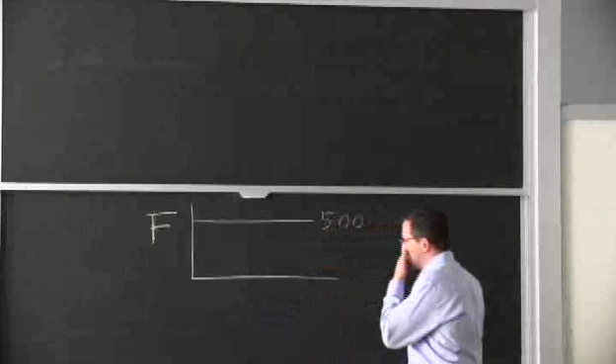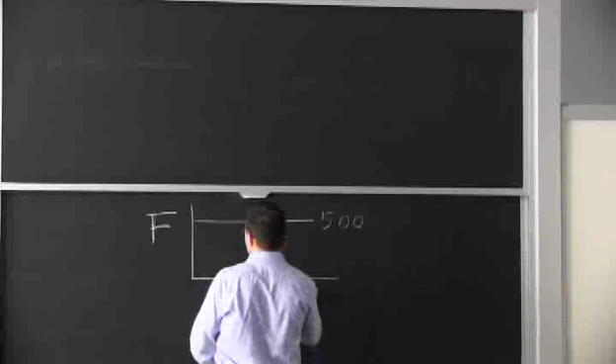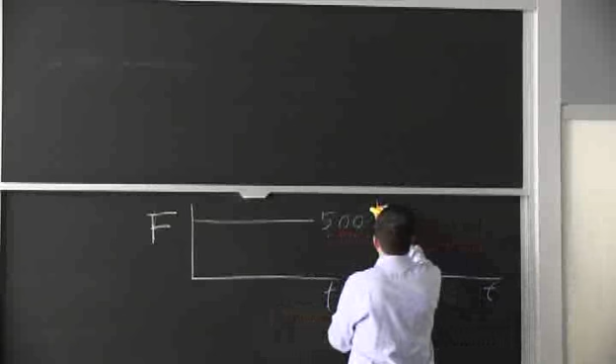So it's a constant load. We put 500 pounds on a specimen in my test fixture here for the binding. What happens is over time... and I should plot this separately. So this is time in both cases, and now I'm putting the deformation, which is essentially the elongation divided by the original length of the sample.

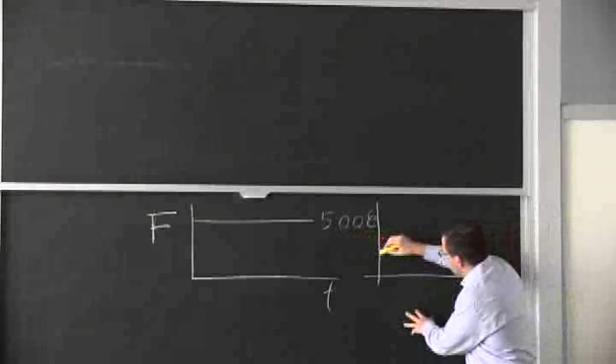Initially, when I apply the load, I have a certain amount of deformation that's given by the elastic constant, or Young's modulus, and you're all familiar with that. But after that, over time, you'll have a continued deformation that will typically slow down. So in there you have a viscoelastic response, and then you have a viscoplastic response.

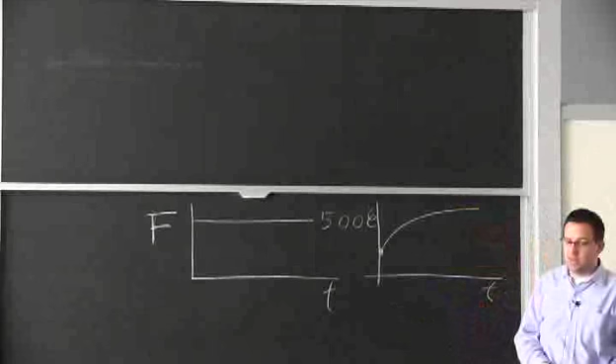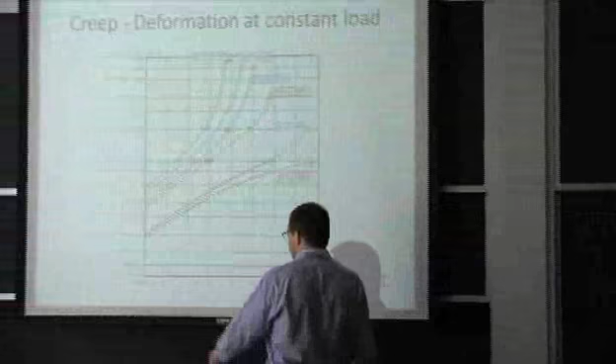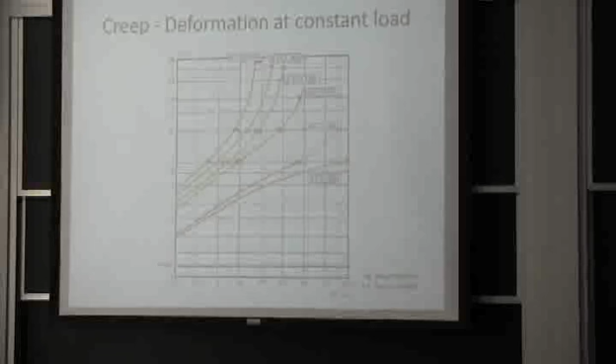So it keeps deforming, and even though on my plot here it looks like it's going to a plateau, what you're seeing on the screen is a log scale. It goes from minutes up until 50 years on the same plot on a logarithmic scale. And you can see there that as far as the plastic goes, in this example, at ambient temperature, it keeps deforming. As long as you have load on it, it deforms.

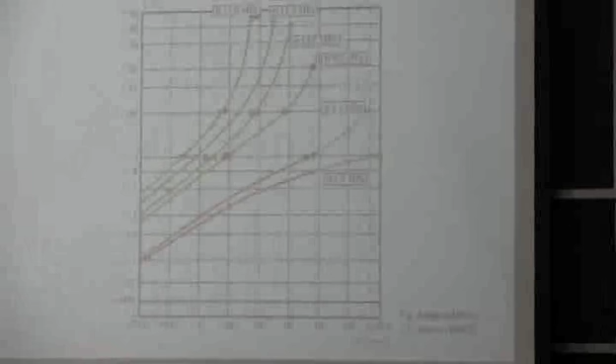Depending on how much load you have, and these are the different green curves, you can have a failure in creep, or you may have a useful life. There's a big distinction between them.

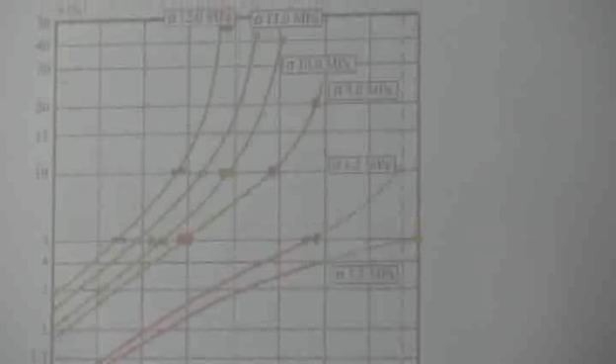Some of the red curves here, looking at the lower one, it's only 5.2 megapascal as opposed to 12 megapascal for the highest one, on a plastic that could have approximately 30 to 40 megapascal of yield strength. So it doesn't matter too much what the yield strength is if you're going for a design like this with long life.

What matters is how you're going to evolve in terms of deformation and ultimately fracture in a long-term application of approximately constant load. And we have an example of that, and I'll circulate it.

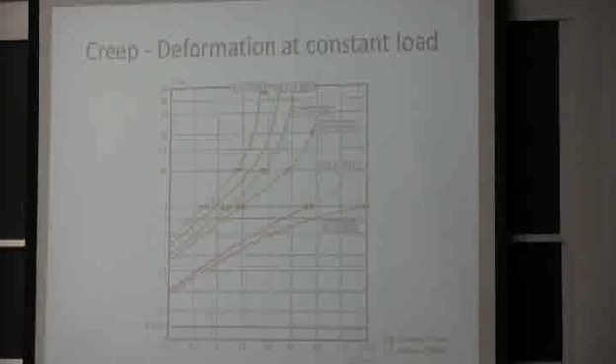This is a CPVC plastic pipe. It's used for fire suppression systems, so it's at relatively high pressure, maybe 150 to 200 psi, about twice what you have in potable water.

Now there's one side that's flat—that's a cut we made to see half of it. But on the upper side, what you see are a lot of small cracks, and probably you'll see the growth from the inside out, which resulted first in leakage and eventually an overall burst of the pipe.

So it does happen. A lot of times it happens because you have a bad overall combination of conditions. It's not necessarily just, oh, in this building it was a little bit warmer, or the pressure was a little bit too high. You have more than one of those variables coming into play.

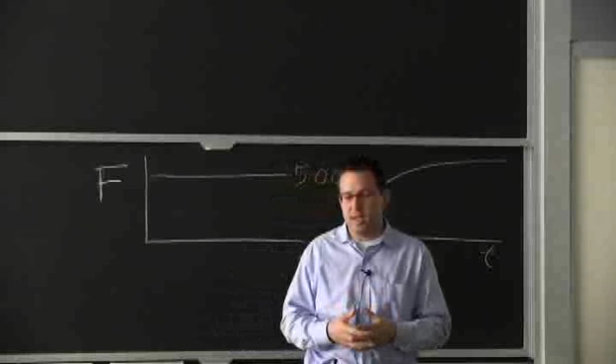And for those plastics, unfortunately, contaminants also make a big difference in helping create the little cracks. But the overall process remains that you don't know anything about whether you have damage being created unless you go and look for very fine cracks.

There are other cracks very close to the one that you see there, and they're visible because there's a black discoloration. But most of the time, it's on the inside of the pipe, and there's no easy way to find out that it's there.

It happens under constant load—the creep—and it's slow. The first step is you deform, so you grow the diameter in the case of the pipe. Eventually you start a crack, and the crack grows slowly. In this case, it did grow all the way through the thickness before you had the final burst.

Can I ask a question about that? Yes. Do you know, does the orientation of the pipe matter? Do these cracks begin on the top or the bottom? Sometimes they do—it's a very interesting question.

My comment would be that it's very unfortunate for those pipes that the hoop stress, all around trying to grow it, is about twice as much as the longitudinal stress, and the extrusion direction makes it stronger in the longitudinal way. So I'll detail that to make sure we cover this.

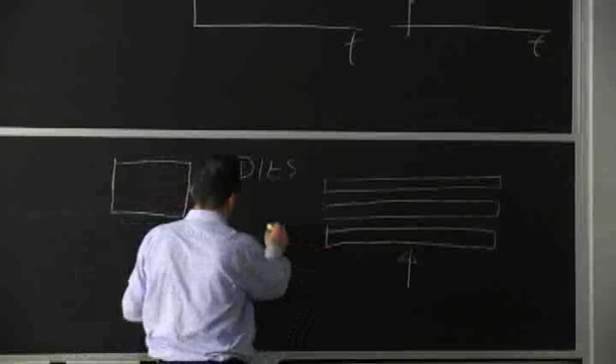So to your question, with respect to what we call the clock position around the circumference of the pipe—is it going to be on top, at 12, or at the bottom, 6? Sometimes it matters and sometimes it doesn't, and I'll tell you why. If you have a certain amount of contaminants in the system, having more of it doesn't make a difference—it's a little bit like a catalyst. And therefore it becomes relatively well distributed all around. In that example, I don't remember if it was the bottom.

All right, so any other questions? If I keep saying a word you don't understand, please interrupt me—there's nothing wrong with that. And if you think it needs clarification, I'd be happy to pick it up.

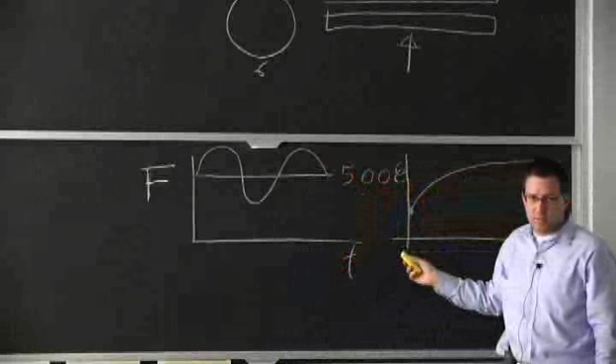Fatigue is very similar to what we had up there, and therefore I'll reuse it. Except now, instead of having a constant load, I have a fluctuating load. There are different ways you fluctuate the load, but that's the way I used here. Then you can count either half cycles or full cycles, depending on how you do it. And you can have it with what we call a mean load—it's still 500 plus or minus a certain amount. Or sometimes it'll be 0 plus or minus a certain amount. This creates the same amplitude, except the mean load is close to 0. And we call that the loading ratio.

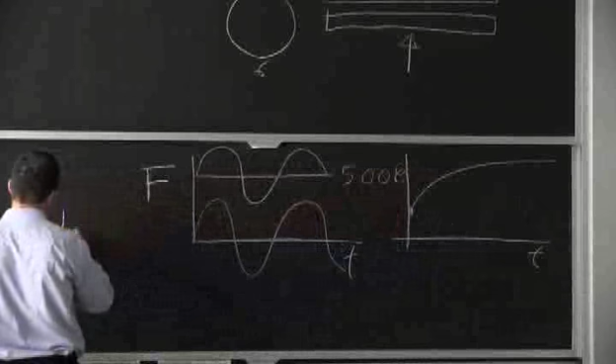It's coming—in most fatigue books it will give you R, which is the minimum over the maximum. That's all there is to it. It's only helpful if you're trying on a chart to figure out if the fatigue data you've been given is relevant to your application. So that's where this comes in.

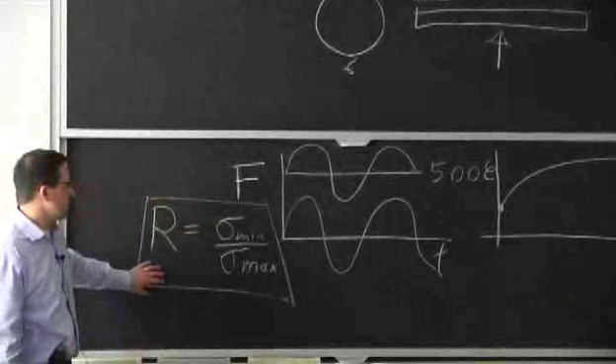If we have the sprinkler pipe we talked about, the pressure fluctuation would be day and night, or turning on and off the pumps. So you'll have a relatively high minimum stress, not too far from the maximum stress, so it'd be close to 1 here—let's say 0.75 for our reference. And when it's varying like this, it's -1. That's a standard, if you will, for some of the measurements. There are other standards, but it typically goes from -1 up to a certain amount, close to 0.75. So we cover the range here.

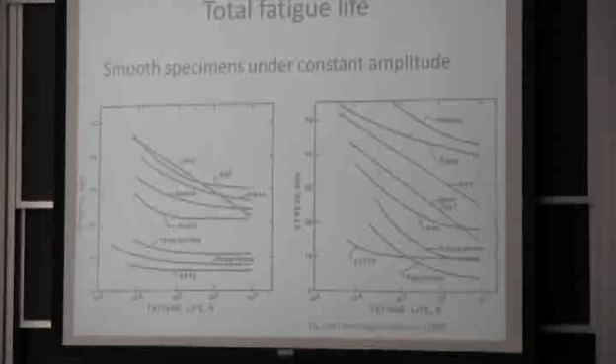Good. Those curves I've put on the slide are just examples to show you—these are plastics that will have different strength in a long-term application. Some of the common ones, polyethylene and polypropylene, are not really the best, but they have other advantages in terms of forming, cost, and density, so they're still used a lot.

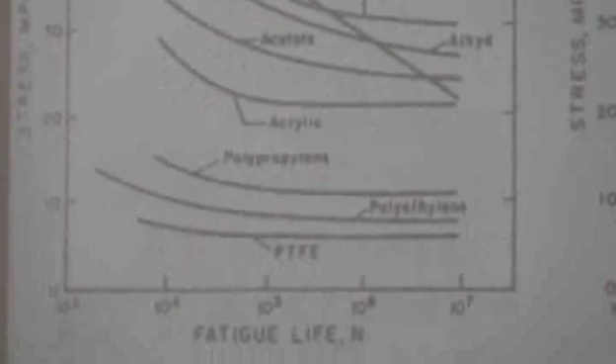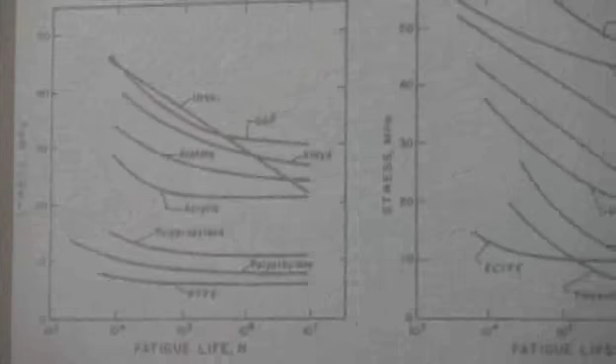But you can see you can't go just by cost. If you have an application that's a little more demanding—some of the components inside cars close to the engine—they'll go to a nylon type material as opposed to polyethylene and polypropylene because of temperature. Otherwise they'll have to make it too big, for example. So it's not necessarily fatigue in that situation, it's more the creep resistance at temperature. But it's to give you a flavor.

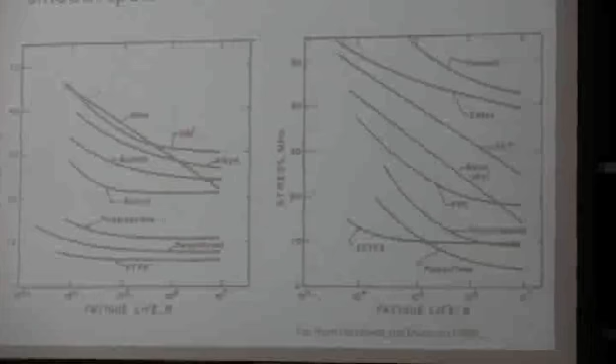This is not—I didn't magnify the scale, I didn't show you from 40 to 50. It's really from 0 to 50 that you have this range of resistance for those different plastics. The example is for fatigue, but it's the same effect for creep—there's a lot of difference. And they also have different resistance to the environment sometimes, to gases.

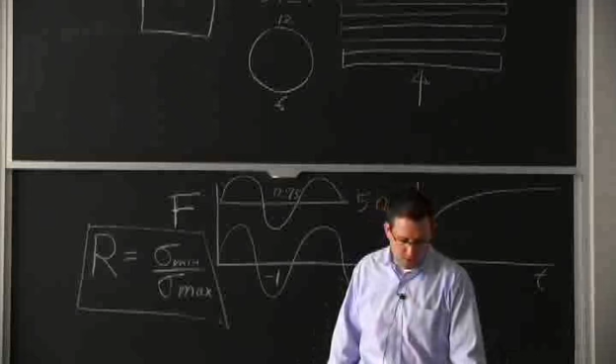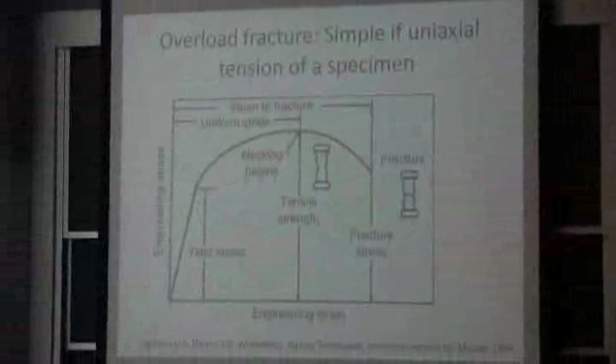You reach a certain apparent maximum, and I want to be very clear about that - it's only apparent. It means at that point you're starting to form a neck, but it doesn't mean the material itself is becoming any weaker. It actually keeps getting harder and harder as you keep deforming it. But now, instead of deforming everywhere, you lose your section. So this curve of engineering stress is still based on the original area, but now your area is reducing fast, and that's why we have that appearance.

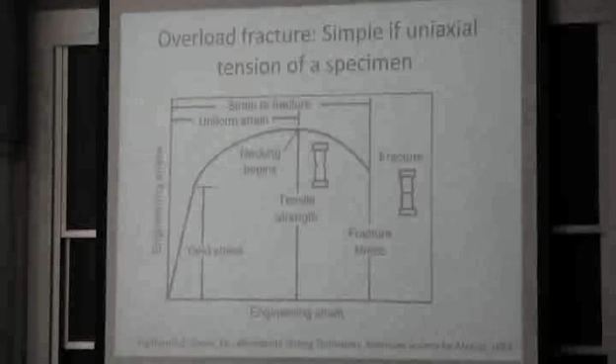I want to make that distinction because I heard yesterday there were quite a few civil engineers, and I work with civil engineers. They see a stress strain curve, they look at the elongation at break - if it's 25%, they think it's important, that the value of 25 is very different from 22 or 28. But at the end of the day, that value of elongation when you reach the fracture stress

is a combination of what your specimen is, and also, obviously, your hardening. The more you harden, the more you'll be able to deform and stretch before you get to that neck. But if I take a thin specimen of the same material, it will start necking more slowly than if it's a good, round, big piece.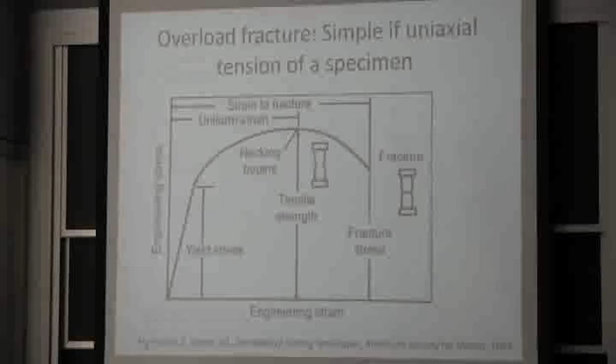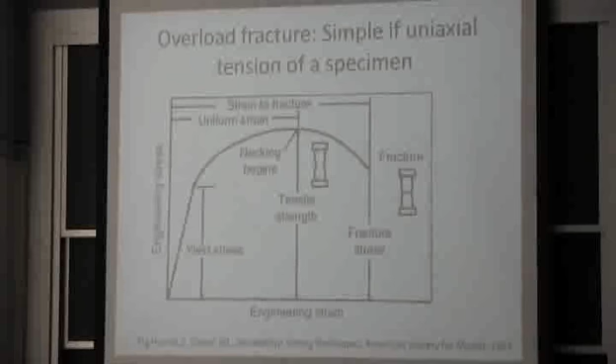So all those values, the fracture stress and the elongation at break that we talk about a lot, are not intrinsic material properties, we call. They are engineering data that we can use, but we should try not to overuse it. We should try to understand what's beyond it. And this relates to deformation, so I'm going to defer on the details - I don't want to leave you with an incomplete description. But for now, I think the idea is, if I take a specimen in the laboratory with that constant section and I pull on it, it's different than in other applications.

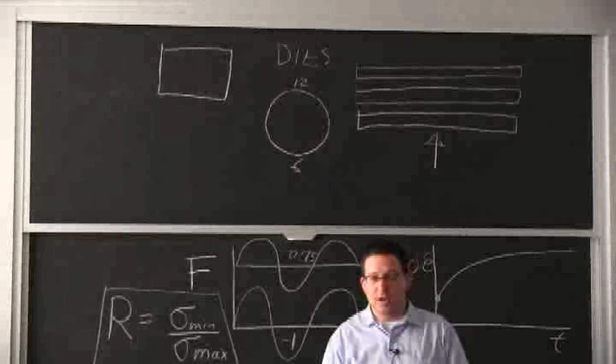For example, here, I'm going to pass on those screws. If we had done the material test on those two screws in the laboratory, we would have gotten a stress strain curve with maybe 20% elongation - I'm making up the number, I don't know exactly what it would be, but a certain elongation. But if you look at it, the way it broke, there's no elongation. And then the question is why?

Well, it could be multiple reasons, but one of them is you have these threads here that act as stress risers. This is another stress riser example from any elementary class: if I have a hole in a plate, the stress around here is going to be 3 times what it is far away when I'm pulling.

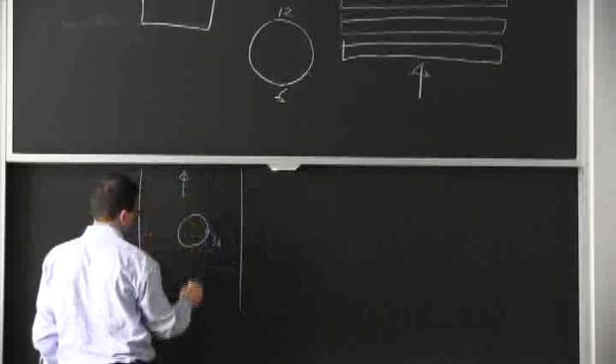If you have a notch on the surface, which is what we have here, it's going to be an even higher factor. So what I have is actually something like this with a small radius, and goes the other way - so I'm making a screw here. I'm going to say 5 to 10, depending on what the situation is.

So that's really where the question of whether you have a ductile material or a brittle material comes in. When you are in a constrained situation - and we saw that with the fastener that was holding my gutters when we had the snowstorm last year - it really didn't do too well. It didn't neck, and therefore all the information from the stress strain curve is useless. We have to go to another level, and that's what we'll cover next week.

Another example where you can't use the stress strain curve the way it's set up. Let's see, I'll use these. If I have a detail where I manage to get the material to work in shear - and the way I do that a lot of times is what we call gusset plates. Oh yeah, civil engineers, so I have to be careful, you guys know all about this. So I put a plate, and then I have a member coming in, say

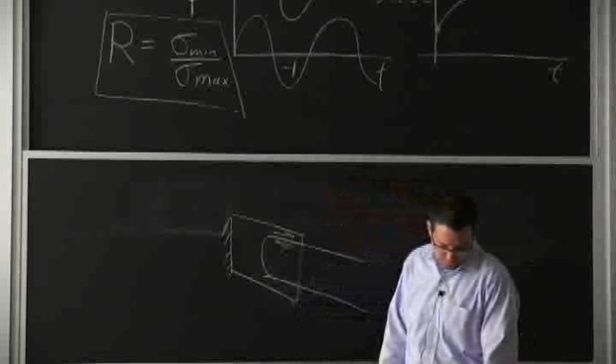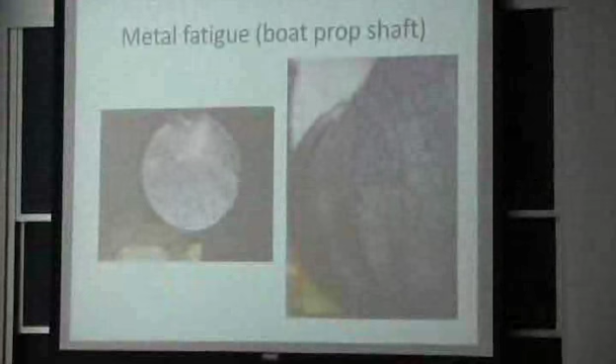Another example here is a shaft for a sport boat to go in the ocean. That was a side project a couple of years ago. Somebody came, said he lost his prop after using the boat for 200 hours, and he was very upset about this. He wanted to know what was going on. It's a very fancy piece of equipment, an Inconel, about 6-inch diameter shaft. And the question was, what happened? So I had to find out a little bit more about what he was doing. I asked him if the prop was balanced. Sounded like the first question to ask.

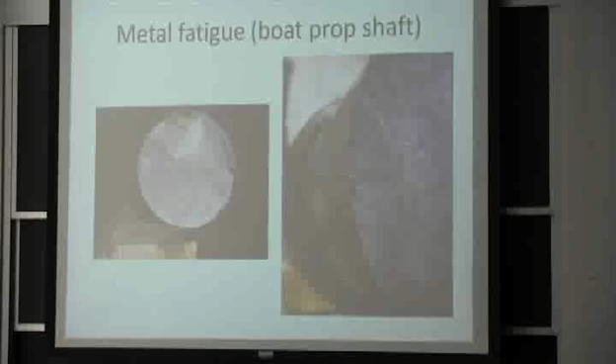And I also asked him if for any reason some part of the prop was outside the water. Yeah, the prop was good, and it was in the water, balanced and everything. But I got to talk to his mechanics enough to understand that it's really a high-speed boat, so only half of the prop is in the water as it rotates. So what you have is as simple as this: the shaft goes off the back, and you have the prop, I'm going to make it circular. And it's rotating, but the water level is right about here.

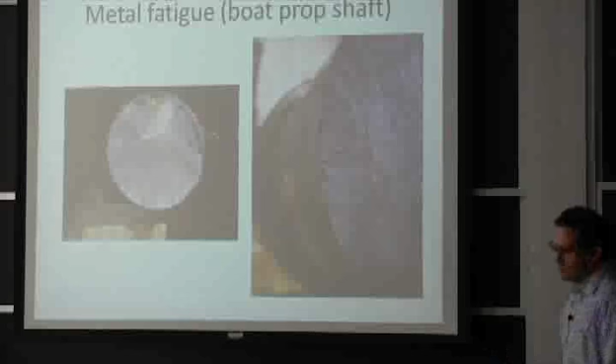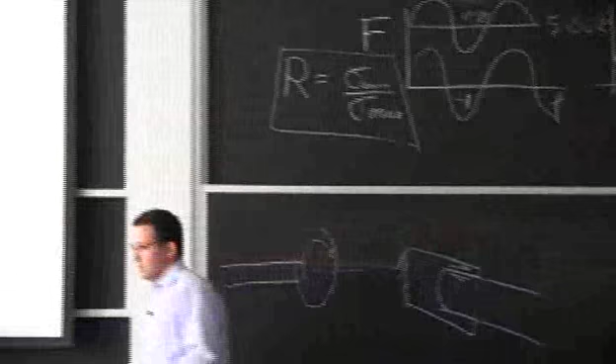And therefore, at each turn, you get a huge bending load in the shaft. That's what I saw on the fracture here, because the crack started in the lower left corner right here, and you see all these lines over here up until this point, call them beach marks sometimes. And then eventually right here, there was the final overload. But by the time you had the overload, you already went through half the section almost of that shaft. So it wasn't a crazy high load because it would just bend the whole thing. At the same time, it was a very significant load because after you've gone through half of it, the load was sufficient to break open the other half.

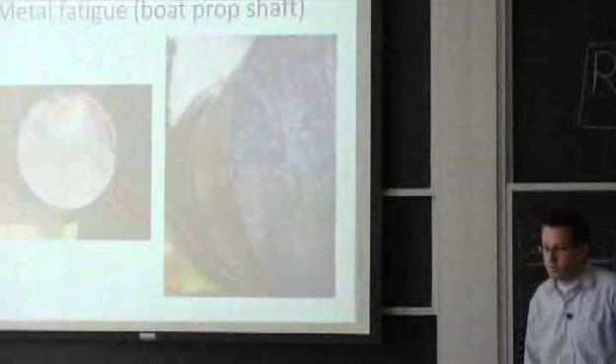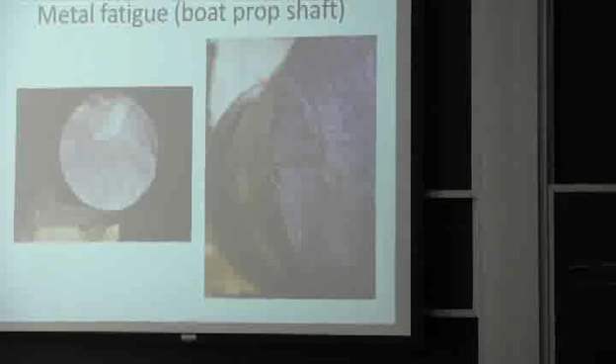And we have some material properties that we use to figure out approximately what that load was based on the crack size. That's also something we'll cover in the class, but I wanted to bring it up right here. There's a blow-up image on the right-hand side - that's your initial flaw size. It is visible; if I could bring that shaft in, you can see it if you're careful, but it's small. On a 6-inch shaft, it may be 0.5 millimeter. But even at 0.5 millimeter, you can tell that it started from one place and went all around. So that gives us some idea of what's really a bad flaw.

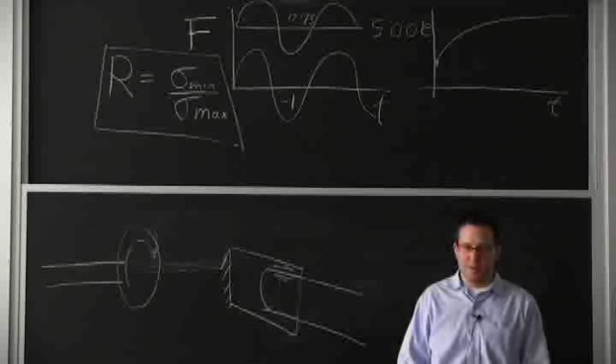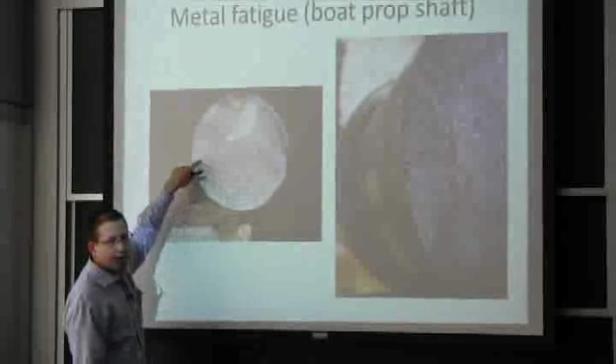This is a bad flaw because we only have one crack that started here. It went all around up to the middle and overloaded. If we had a bunch of small flaws, what would happen is you'll have a little circle around here, another circle around here going towards the inside, a little bit like we had with the plastic pipe. That's the big difference - the flaw size in this case was large. It wasn't so much of a material flaw because there was wear. There was wear between all the gasketing system here of the boat and the outside, and that created that flaw.

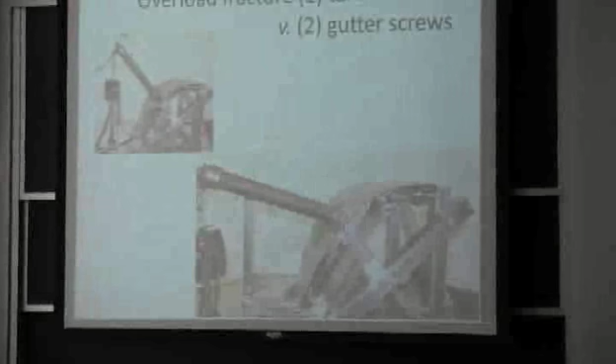But we had to go through the process of figuring it out, and I thought the flaw size here was something different. This is just an overload, a little bit like we talked about for shear, except that it's the bending of a shell, and there are welds and everything, but nothing happens really to the material. It's just changing its shape because it's ductile.

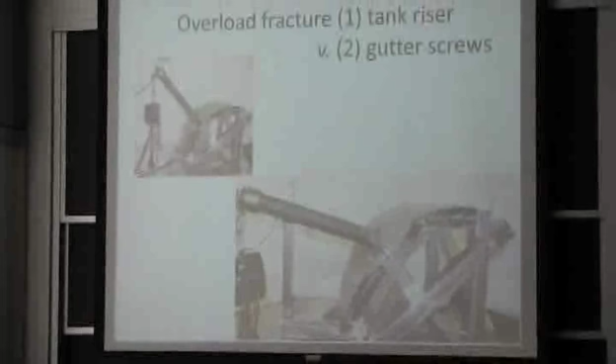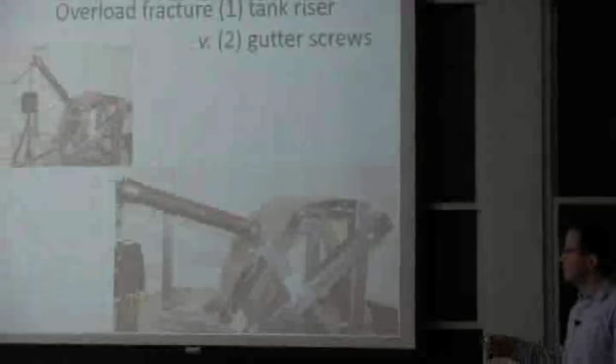So one of the things maybe on top of the list when you design something is figuring out if it's going to be deformable or if it's going to be at risk for fracture without really a change in shape. This was a one-time load. If we had done it 10,000 times, we'll take that pipe out without deforming the plate right here. So it's very important to keep in mind that the reason this is different is not so much the geometry, it's because there was one overload as opposed to multiple loads.

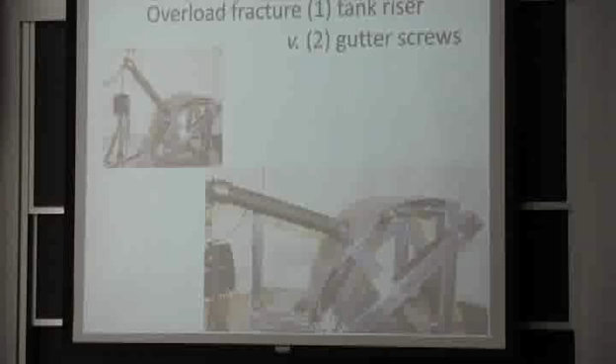That's very important to find out when you're designing a product or a structure: how many times is it going to be loaded and unloaded? Sometimes it's easy to find out, sometimes it's not. We'll go with an easy one.

It's the front wing of an airplane that extends out for takeoff and landing to create more aerodynamic resistance and get a little bit more lift. Have you seen those? We hear them all the time, we hear the little mechanism for them. It makes a lot of noise, gets people worried. I get worried.

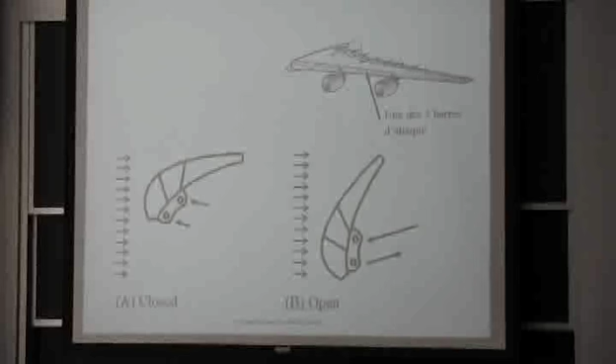There's one of the things that's important about it. It's at the very front, and the aerodynamics there is critical. It needs to be able to extend out for takeoff and landing. It also needs a de-icing system, so you can keep doing your maneuvers even if you have to land in bad weather or take off in bad weather. It's mostly for landing. For takeoff now, they heat things up. They heat the body. So that's how it looks.

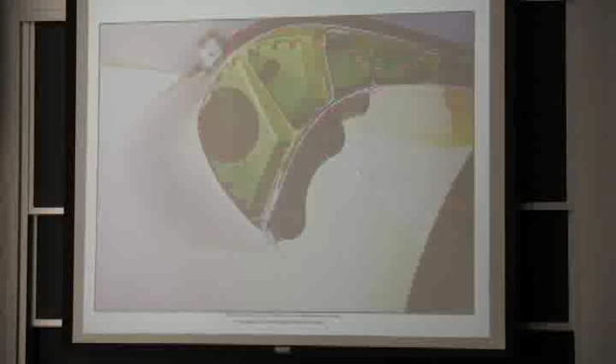You have the skin, aluminum skin, and what's in green in this case, the titanium rib. It's the same rib that has two holes on the right-hand side, and the big hole here is for air circulation. They'll bypass air from the engine exhaust and heat things up when they have to. And that's the main reason for using titanium here as the primary structure as opposed to aluminum - it's a temperature consideration.

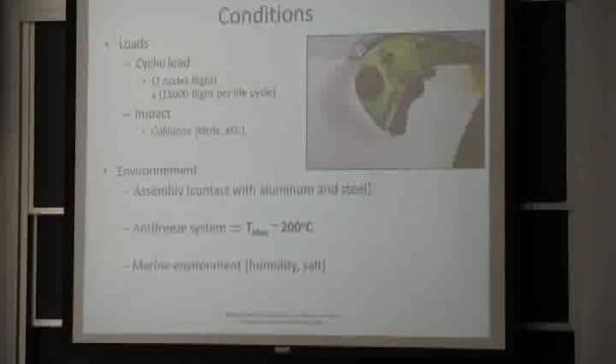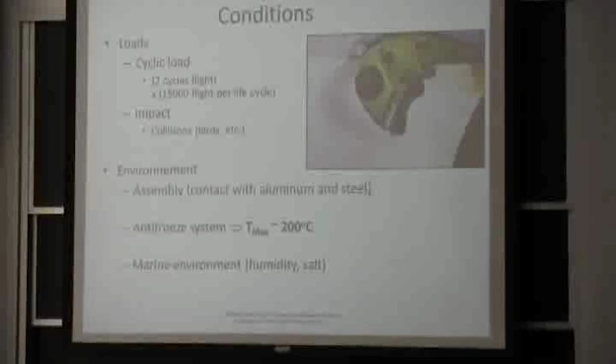So we know how many times the aircraft is intended to take off and land as part of the design process. It's actually pretty specific a lot of times. You could have some impacts, but mostly in the retracted condition where you don't have too many loads. So you have to figure out how you're going to make it into the assembly and resist the environment.

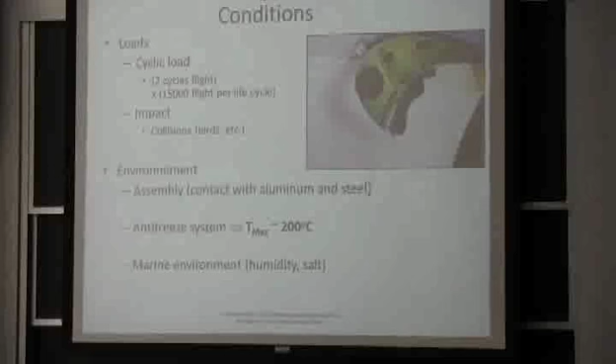And make sure it doesn't crack, right? Because that's what I want to talk to you about today: creep and fatigue.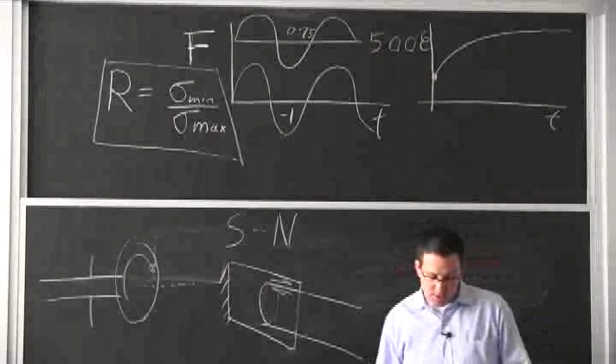And I can use that data to evaluate if my product is good or not. Well, that's risky. What if I have a big scratch? What if there's a casting defect? Because some of those were going to be cast.

Well, that's why in aerospace, a lot of times they use the other approach called crack growth. So that's the lower left. We put a crack in the specimen that we test and make sure that even with the crack, it will make it through the entire life.

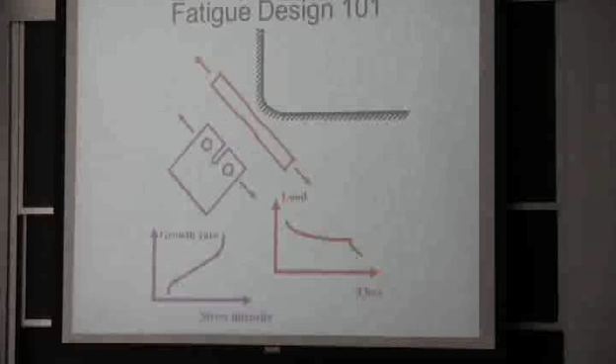And some people will call it a damage tolerant approach. So on an airplane, you'll see cracks on the aluminum fuselage, but they're okay cracks. They get monitored, they have different sensors with eddy currents, magnetic particle inspection. They go and look at the cracks. When they find one, typically they keep monitoring it. Sometimes they can make a local repair, but a lot of times there's a certain length that's still acceptable because it's built into the design.

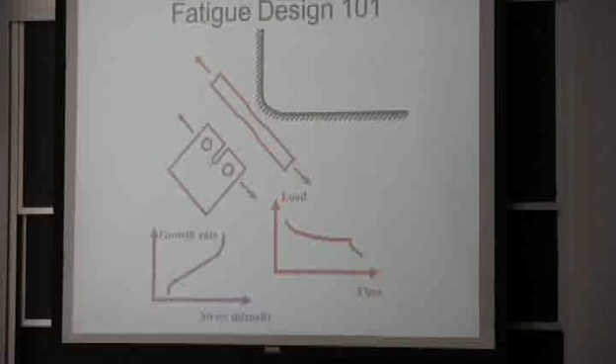And that was the case for those titanium ribs for the front fuselage, because they can't be inspected easily. The way we designed them is we allowed for a crack to exist from the beginning, and through the 30,000 up and down cycles that were anticipated, that crack would not grow to a size that would create an overload fracture. So it was a conservative approach, because we really could not inspect that specific structure once it's all built together with the skin on top and all the rivets in different directions. That's what you've got - you can't do anything about it.

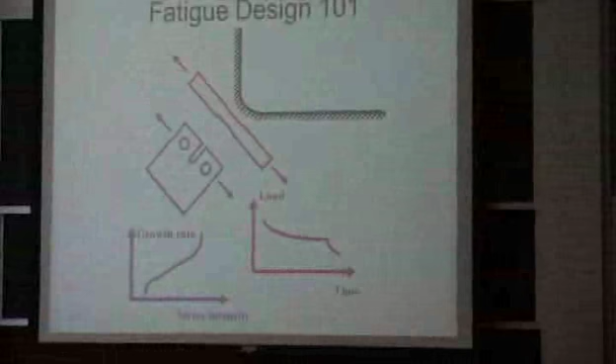Another aerospace example would be turbine blades. It turns out that if there's a crack in a turbine blade, it's going to break very quickly. There's so much load on those components that defects associated with cracks are not acceptable. So it has to be a design based on a smooth specimen type approach, with more inspection and testing of every piece that's made to ensure there are no impurities or geometrical defects. It will go through very sophisticated surface finishing treatments and casting processes.

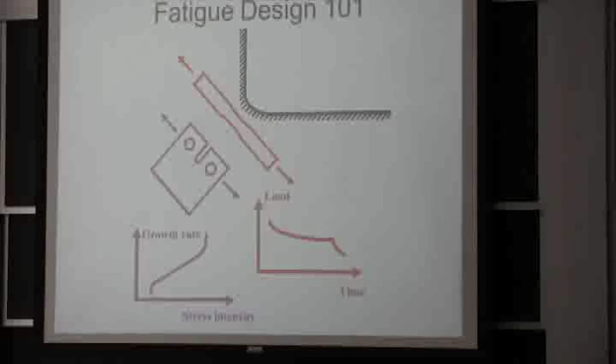So I hope this gives the flavor that depending on what you have to build, you'll use a very different approach. It may look disconnected, but we'll try to have cases where we bring together more than one approach, because more than one may be governing.

Now we're going to go through a few examples that tie back to the class and processing. So here we have SN curves for titanium alloy, and we're looking at the effect of oxygen content. Why oxygen? Well, it gets into the brittleness or non-brittleness of the titanium, so it turns out to be relevant to the cracking of it, and you can see the difference.

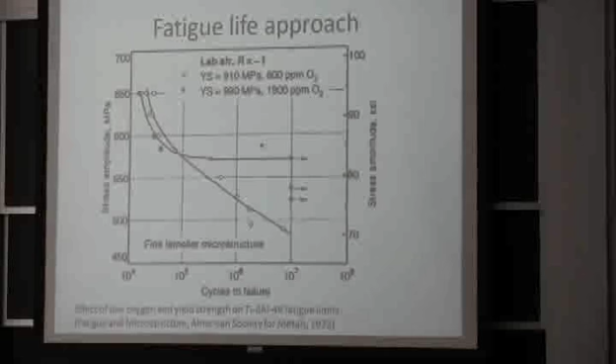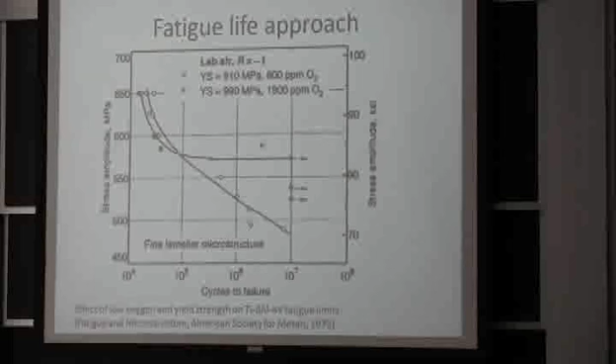In one case, you go to a large number of cycles. When we talk about fatigue life, a lot of the time we're going to talk about 10 to the 7 cycles. We may have a fatigue life that's about twice as high with higher oxygen content. That tells you that for some of those properties, you have to be careful of your service conditions. Titanium is actually one of the materials that's very tricky to design for, because people think it's good for everything, but it's not. I guess these are examples of that.

You guys know about grains in metals? Most metals contain a large quantity of grains, somewhere typically in the micrometer range, so you have to go to a microscope to see them. It's not like pieces of rocks that you can see with your naked eye, where you'd say 'oh, I got a grain right here, another grain right there.' They are very important and they influence a lot of properties, sometimes in different ways.

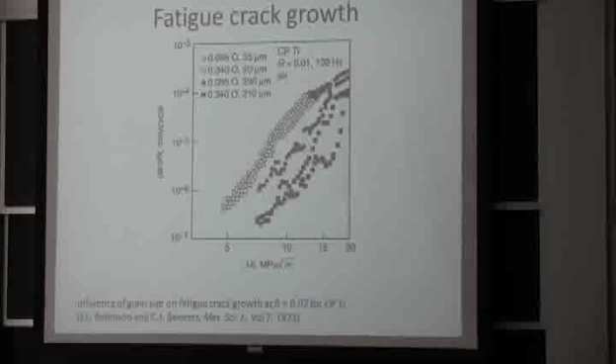So it's not an uncommon effect for this specific type of cracking to require big grains, and they do that for turbine engine parts, for example. But most of the time, and in most of this class, we will want small grains for other reasons that we'll talk about.

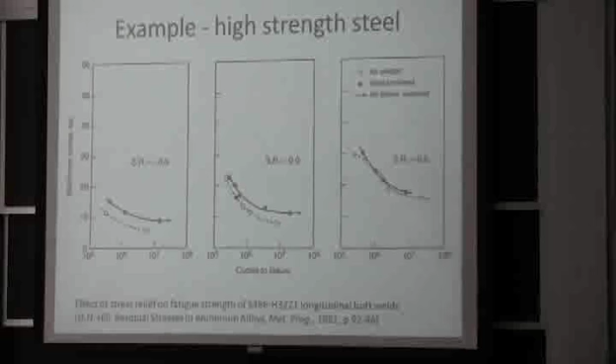Welding. In general, welding will reduce your fatigue strength, the strength when you cycle the load, by at least a factor of 2. That's going to vary depending on the condition. The curve here, you can follow it.

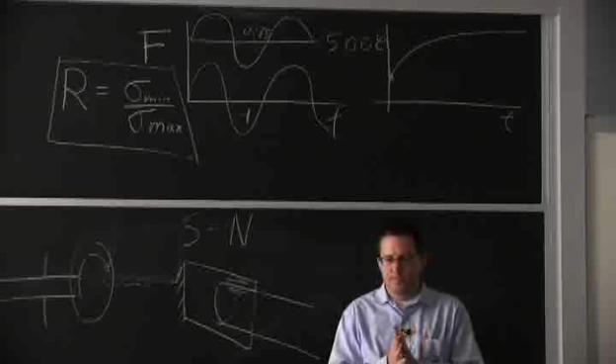Yeah, we covered that. The summary at the end, you'll have it in your notes, but I think we already went through it. Just one word about Friday: I'm going to go into a summary of deformation concepts that will be used both for the life assessment part of the class and also the forming part of the class. I wanted to tell you that we're going to be covering the first three chapters of the book you were given, not in all the details, but if you're interested, that's where we're going. I try to keep incorporating examples into it.

Everybody know about von Mises? Good? Good. All right, should be easy.